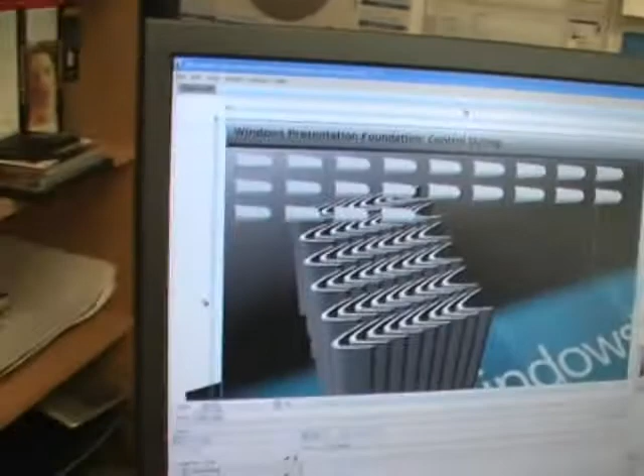So this is Sparkle, right here. The same project is open. You don't need to compile to see all this fancy stuff—it's just part of the thing. There's a timeline as well.

But again, the fun thing about this timeline is actually it creates animations that... take me around here and... just tell me what... give me a tour.

Right, around Sparkle here. So the first time you open the tool, you can tell it's more of an artistic tool than an application building tool. But you have tools like selection, sub-selection, Bezier curve tools, and things like that. There's some 3D things going on here—I can show you that in a second.

You have a project palette that shows you a bunch of what you have in your project—they're files, XAML files, C# files. So that's sort of like what Visual Studio has. It is Visual Studio. That's not it—it's MS Build, which is the same build system that Visual Studio 2005 is using.

Okay, so that's part of the key, and we can show you later. You can actually open up Sparkle in Sparkle. No, that's trippy. Well, maybe not into this—that's referential, too referential for me.

Okay good, yeah, but our whole project is just a project like this one. Then you've got a bunch of controls listed in the library here. There's more palettes than what's open here, but this is just a few of them. So you have things like button, canvas, checkbox, and if I scroll down you've got a few million—well, actually probably 100 or a couple hundred—toggle button, everything. Basically it means that somebody like me, a designer working on user interface, has access to the real controls, not some kind of template for a drawing application, but actual controls.

And if I want to make a radio button behave completely differently in the way it's presented to screen, I can just override the template like what I did here. So here, let's go and get inside this container. Now what do you call this area? This area is the artboard, I guess.

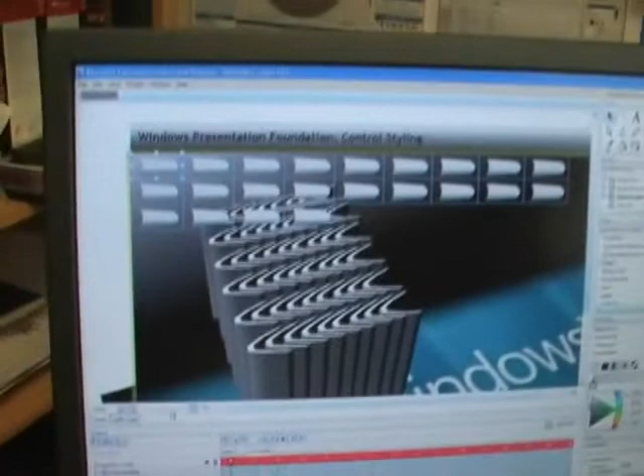Okay, so you can see, you can zoom in and out. I can go back to where I was before. So if I select one of these babies here—now you just demonstrated something—this lets you build resolution independent UIs.

Avalon is resolution independent, DPI independent, and vector based, though it accepts bitmaps as well. The artboard itself is an application that's DPI independent, and Sparkle is entirely built on top of Avalon, so it's all vector based. So all the visuals in Sparkle, all these icons, the palettes themselves, all the controls, were built using our own tool.

This is the properties panel at the bottom. If you don't have a designer UI in the tool to find the properties you want, or maybe some extra properties developers have created, you can go inside the properties palette and see a phone-book type listing.

Notice your scroll bars have this nice gradient on them. Was that done in Sparkle? Yes, this tool was built using the tool itself.

Ever since the first builds of Sparkle, we have poured XAML bits from our own XAML surface into the source itself. That's how I work - I either do that or tweak by hand when I just want to make a little change. It's kind of fun to have access to the bits, and they're never dead. You can always go back and change the visuals, and that's just beautiful.

You don't need to talk to a dev to change the bits. In fact, I generally just call them over and say, 'check out how this does the cool thing.' You're used to having control in a dev team, right? We're very happy with it, because Manuel can do things that none of us can do.

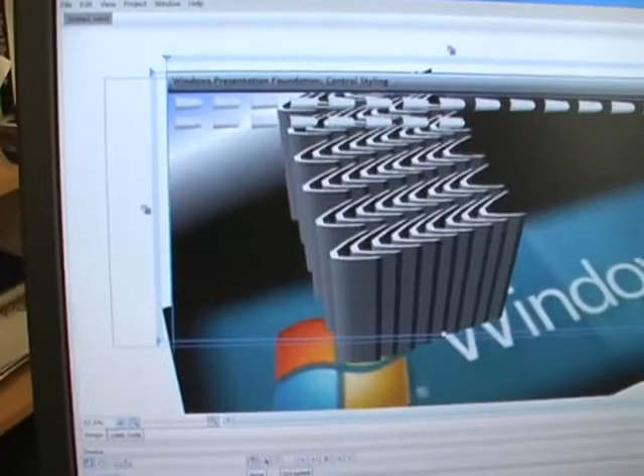Okay, and if I want, I can show the XAML view again, just to show that we're real for real. You know, my new gradient stop is here - that was the white one. Yep, gets created.

But notice the thing is, he said a developer could have written the same code. Well, the thing is when you're dealing with like Win32 and you get buttons and a couple things like that, it's no problem. But here you've got colors in floating point space, you've got splines, you've got these animations that have very careful positioning. The only way you can do that is some sort of visual, what-you-see-is-what-you-get graphical thing. Nobody can calculate the spline in their head to get the thing to look right.

So even a developer, maybe not as fluently as Manuel, is going to want a tool like this to edit these basic resources when they build their UIs. Very cool, keep going, this is awesome stuff. Well, hey, just like my project here is XAML and Avalon, all vector-based, Sparkle's UI is also vector-based, so we could...

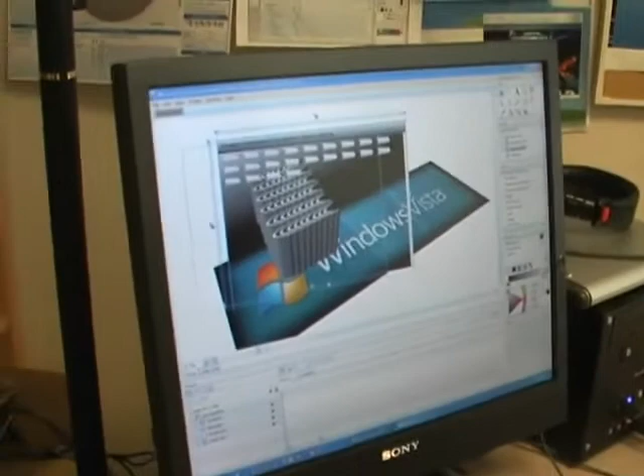We have a feature called the workspace zoom, zoomable workspace configuration. So basically it's something that's going to work very well on high DPI screens, where if you have too much space for your palettes and you have high enough DPI, you can zoom out. You can basically reduce the size of these palettes.

You basically have a slider up there, and you can say, you know what, I really want these palettes to be pretty big because my scene is smaller and I really have a few palettes on the screen. Let's say you're just drawing and you have color and tools - you can just zoom them up like crazy and have a childlike toy on the screen, feel like a palette, and you're just having fun with it. It's really kind of fun.

Well, it's accessible too, because if my eyesight's not that great, I can still use this. On the other hand, you can make it minuscule if you want to, and I've seen this thing work on the newer screens, the 144 dpi screens. Most high-end laptops have them, a lot of workstations have them now, and that's not even talking about the 200 plus dpi screens that are coming out in a couple of years.

The thing looks gorgeous, even zoomed out all the way, small and tiny - it's still very readable because it's almost like print. So the feature makes a lot of sense, and the fact that we have it in advance is great.

Do that again - he's apologizing for it because it's really cool. This is the feature that when you're doing the demo, at that point everybody goes ooh ooh, and it's like you won, you can just stop the demo at that point. They see that and they're like, oh, I understand what Avalon's about. This shows what Avalon's about.

Useful too - it's very useful because if you have a 200 dpi screen like Bill Hill has in his office, the icons are way too small to read. Yeah, well, actually, if it's well calibrated, if Windows knows it's a 200 dpi screen, it will be the same size as this, but it will be beautiful, just sharp.

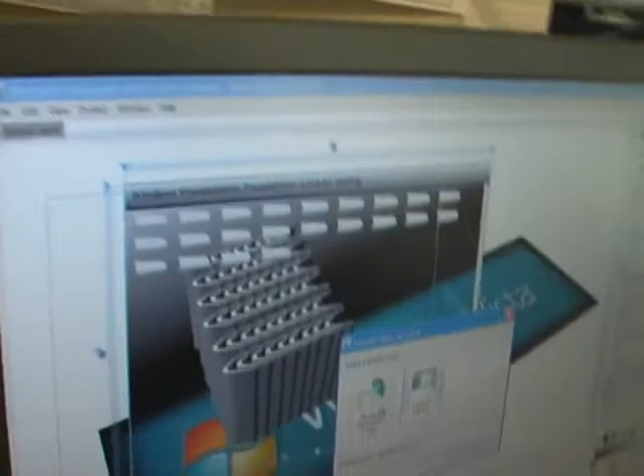What are some of the drawing tools? So for example, if I create a new project here, I can create a control library if I want to. But there you go.

We can use C# or VB on the project as well. So if I have this, my document...

Keep in mind, we also had an interview with the acrylic team, and they were showing me how to do really beautiful bitmaps. They said you should talk to the Sparkle guys about what to do when you bring in a bitmap from acrylic. Well, actually, in acrylic you can produce bitmaps and import them in if you don't need the live object model.

You can also export XAML files directly from acrylic, bring them in, and then they're all elements in Avalon, so you can go and code against the names or IDs of these strokes, like changing the hair color of a character. You can just write C# against them.

Pretty cool. So here, drawing tools wise, as I showed, you can change the color of things. For example, we can draw rectangles - pretty boring, but you can change in real time the corner radius, which is actually the RadiusX and RadiusY properties in Avalon. And then you can drag the object around.

Another thing we can do is change the fill color. So if I want it to be a linear gradient brush, now I get a linear gradient brush. If I want to move around how this is oriented, I can use the brush transform tool, which gives me a box I can stretch around the actual brush, not the object. It behaves the same way the object does, so you can rotate it and all that.

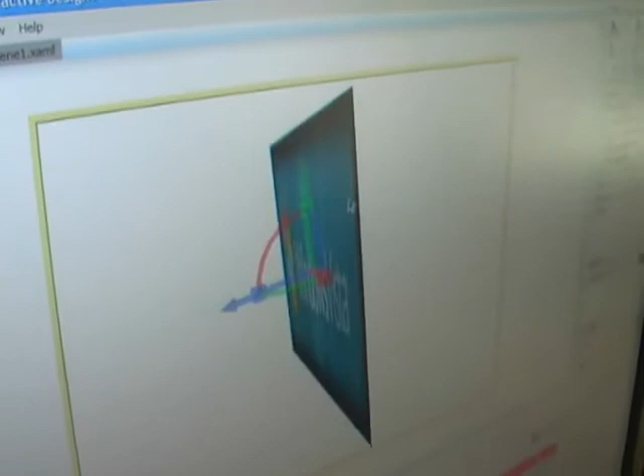It means just default properties assigned to objects. If I go into the OnLoaded timeline, which just has the OnLoaded start trigger on top, I can record any kind of change. So I select the object itself, go to 1 second, and start rotating it, scaling it in Y, moving it like this. Now what happens if I scroll back and forth? It recorded all that like a macro. If I press play, it's not going to show up anymore. Hold on, actually clicked on something, made it invisible. So now, there you go.

What we can do is look at the XAML. All that stuff is recorded in XAML. Now, when you're a designer building XAML, a developer could also code this in C#, and the result is the same at the end. So we're not just giving them a binky to play with, it's the real thing, it's the car, it's the keys for the car kind of thing.

So here, this is so cool. What do I have now in my XAML? You have a storyboard with a rotation 3D animation using keyframes. You don't want to type this by hand. You could, if you get Visual Studio, if you're Raymond Chen or something. But anyways, let's go back. There's only a couple of Raymond Chens in the world, but I think they all work at Microsoft.

So it's kind of awesome, you can see a little bit. That texture could be a live data-bound object. You could see the currently selected person's face in an address book or something like that. Can you map a video to an object like that? Does Sparkle let you do that?

Next video. Okay. Next Channel 9 interview.

So not in this build, but in a future build, you can do it. It's just we haven't hooked up the UI quite much on top of this yet. Okay, next builds. Cool.

What else do I need to know? How do I distribute? So I built this killer Sparkle app. I have some C# files, some XAML files, some bitmaps and resources. How do I give this to my users to look at?

So if I press F5 now, I can see that it asked me for a password. And then I can go to, it should open in the browser. So now it's compiling. Yeah, it opens and actually I have IE7 installed. And now there you go. I have my application in IE7 installed. And then you can click on this guy.

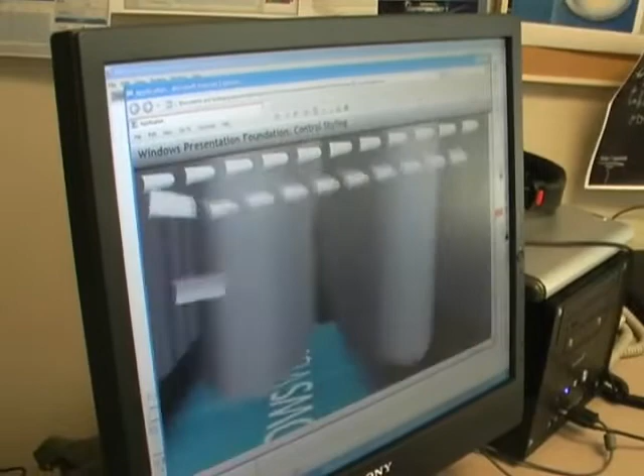So this could be a web application, but it basically has the full power of .NET, Avalon, everything - 3D, 2D, video, text, data bound, and so on.

Now, when it compiled, what does it look like on the hard drive? Is there a manifest? Is there an exe? Let's take a look at it. So there's a bin folder that was created, and then it went through control styling. Oh, hold on, I'm in the wrong folder here.

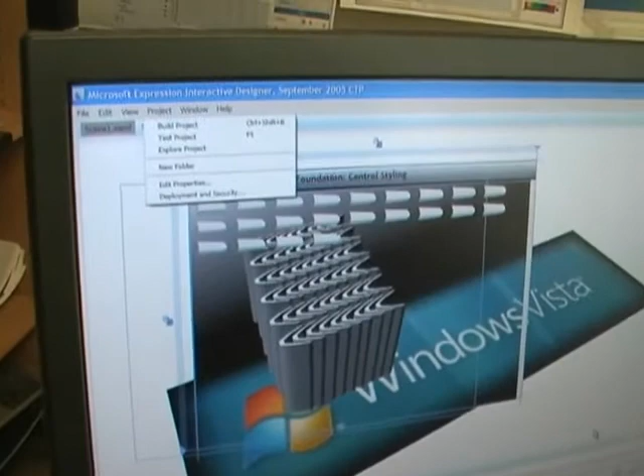It is a pre-release version. Yes, that's pre-release, all right.

Dead. All right, we'll have to cut that out. Can you get to it so I can cut this out? It may come back. Yeah, that computer for some reason the past few days has been just hanging for a few seconds and coming back a minute later.

All right, so it has a manifest. What does it look like when it's actually - yeah, okay, there you go. We're here. So I have my folder with my source files. I can go to my bin folder, release, and now I have a WBA file, so Windows Browser Application. I believe that loads the manifest or something like that.

Yep. So do I put this up on my web server, all this stuff? I believe so. And then the WBA is what I actually link to in the URL? I think so, and then you have some MIME types to set up on the server. And I believe they support any servers. Yep, so any web server with the right MIME type should be able to serve these to clients.

And when you built the project, you can decide to be a web app or a normal standalone, full Windows trust style app? Yeah, if you're building a new Word or new 3D Studio Max, a large application, this is not just to make little stock tickers - this is the real deal. But then you create a full trust application, you have access to disk and all that, you can have a start menu install and all that.

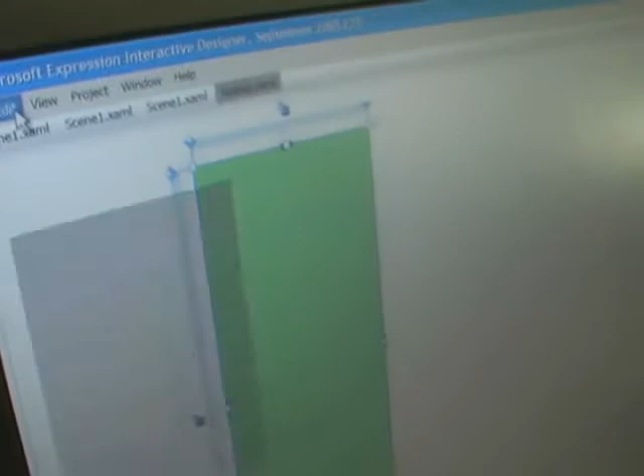So I take this rectangle here, make it some other color, who knows, and send it to back. Actually, heck, I'll even make it a linear gradient just because I can. Something like that - good enough. And make it some rounded rectangle sort of thing. If I'd been asked to do this in some other application, I'd have to take this particular gradient and make it an image, save that and make that the background and all that stuff. Here I just get to draw it, and I'm done.

And it just works. What I can also do here is say, well, if this was really Messenger, you'd want some ability to drag this area up and down to have more or less area for the conversation. So I can add that sort of thing right here without any code or anything like that.

All I'm going to do is go here and say I want to split this into parts, just by hovering over this area, right hovering here over that edge. Just by hovering over that, I made a little grid line here, and I can adjust where things are going to be.

And this right here is a design time control. As you can see, it's not really on the scene.

So what I'm going to do is make a little splitter control. I'm just going to draw the splitter control out. I don't have to make a new container, I don't have to rejigger anything I just did. I've just drawn out a splitter, and I'm going to say I want this area over here to be roughly fixed in size. This one here is going to stretch with the application size, this one is not.

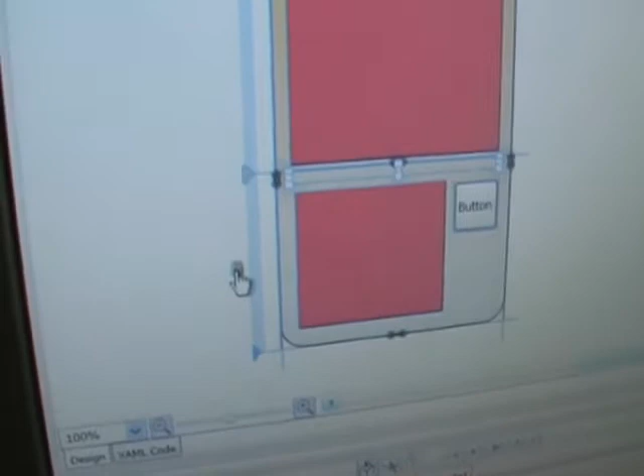And now all I have to do is press F5. Okay, so now I have an application that when I resize it, the bottom part stays fixed, the other part doesn't.

And then there's also a splitter right here. When I move the splitter, it adjusts all that stuff, and I can still continue to resize the application. I'm starting to get something that works really like people expect.

Right now the splitter is sort of invisible, but I could just as easily change the color. I'll just change the background color to be something more visible. And there, now it's visible.

I could change the style of that splitter so that it could be an ellipse or anything like that, or a large set of objects, and I could just make all that stuff look any way I want, and I can do it without having to ever call a developer to make it work.

This is awesome. So I can see we can go all night on how to build all sorts of different kinds of UIs. You probably have 50 samples. There's data binding next, and in the interest of your tape length, I'll let somebody else have a turn.

Okay, so this is awesome. Are you guys going to be giving classes, like on the webcast, to learn more of the techniques from you guys? I don't know how that works yet. Well, I'll set you up, my wife runs MSDN webcast, so you guys will have classes. It's cool stuff. Oh, you brought a bigger laptop. Oh yeah. So who's next?

I can talk about data binding stuff. So how do I hook this thing up to some sort of database or something so I can see some text in an element like that?

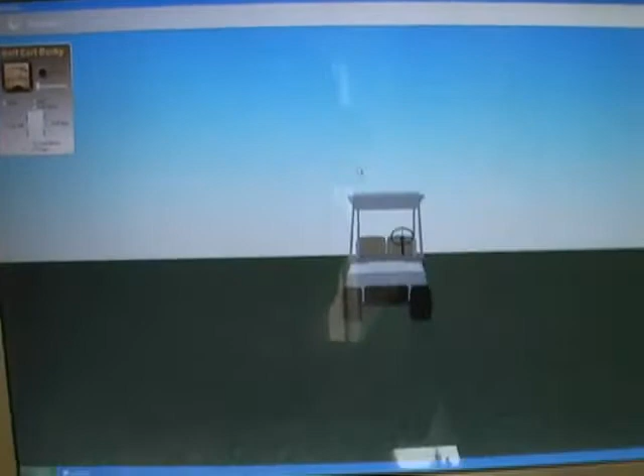One of the things I think is going to be interesting is being able to play with kind of 2D, 3D stuff. So here we can see our cones, and we've got some collision detection with these guys as well.

So if I can drive my golf cart through my cones, we'll see that we can actually knock them out of the way. And I think people are going to have a lot of fun with something that's relatively easy, or easier to code against than the stuff they've been able to do before.

And the fun thing with this is if we shut that guy down and go back into our favorite Sparkle project, we can actually open that guy up. So if I go over to my desktop and go into the golf cart simple thing, we see we have a normal VS project. I could do this in VS as well, as we've shown earlier on.

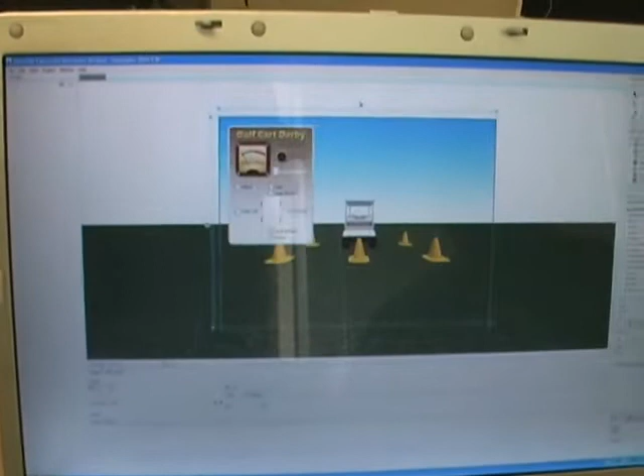Pull that guy open, and there's our little golf cart game that we were just looking at running. I can play around, zoom in, double click to select 3D stuff in here. I can grab my cone and rotate it around. The golf cart itself is a model as well inside of here, so you can grab that, zoom up, and take a look. We have adorners on the pieces of the golf cart, so I can go in and select the roof of the golf cart and move that around if I wanted to.

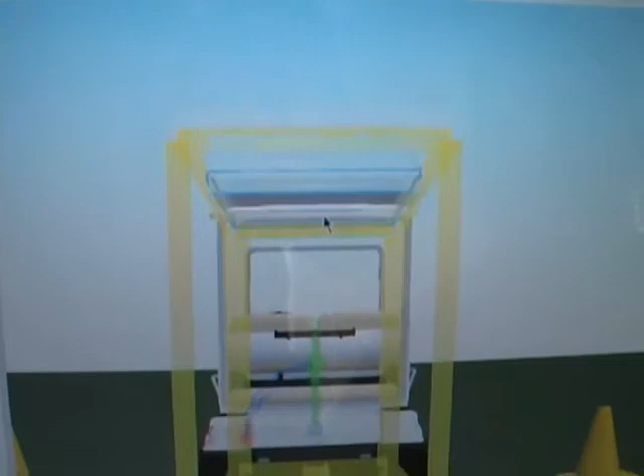All the 2D graphics in here are also all drawn inside of Sparkle. So if we look at this guy here, our little speedometer, we have this double click gesture that means I want to get inside of something and select it. Then over here we have an appearance palette way down here where I can see all the little gradient stops being used. If I adjust one of these, you can see how my gradient changes. A lot of designers do a lot of cool work with gradients.

The other fun thing I don't know if we've shown yet is a nice little zooming palette feature, so we can zoom stuff in and out. So zoom the whole app in. Yeah, we can zoom the whole app in as well.

So you can see that already here we're able to do some fairly cool and sophisticated looking bits of graphics. If I click in on the reverse thing, you can see it's just a gradient defined in here, a bunch of stops, and this is pretty typical UI that a designer would know how to play around with. So if we move on, these things are just all built in Sparkle. They're bits of content put together.

This is another kind of app that we're going to show at PDC. That's kind of a sales tool. There's some data binding in here. This is actually a tab control over here, and each tab has a list box inside of it. So this kind of shows you can take existing Windows controls, and you can have your keyboard shortcuts. Yeah, so it just works.

Sorry, my battery's dead. I've been shooting all day.